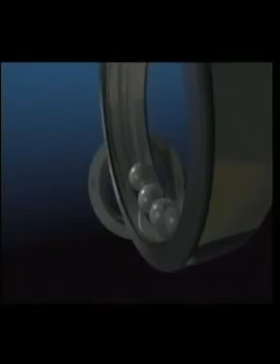The deep groove ball bearing is the most commonly used bearing in industry, being ideal for light loads and high speeds. It consists of an inner and outer ring and a set of balls separated by a cage. This bearing can accommodate radial and a combination of light radial and axial loads.

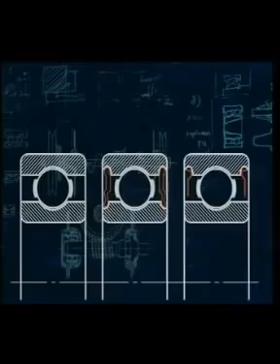The bearing can be supplied in an open condition or with 1 or 2 seals or metal shields. Completely sealed or shielded bearings are pre-greased during the manufacturing process and cannot be re-lubricated. They are commonly used in small electric motors, gearboxes, conveyor support rollers and similar equipment.

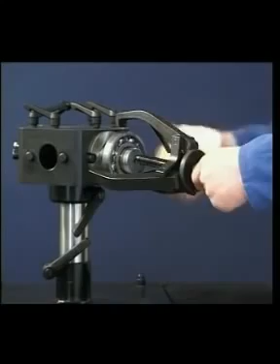For the dismounting of deep groove ball bearings, a number of methods are available depending on the setup of the bearing. The most frequently used method is for bearings with an interference fit on the shaft. For this application, a jaw-type puller can be used.

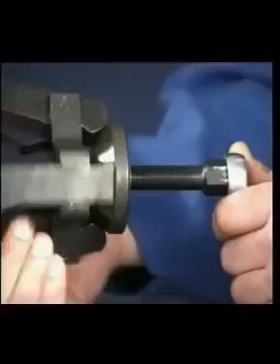The jaws are located behind the bearing, and by rotating the puller and the outer bearing ring, the bearing can be easily dismounted from the shaft, with minimum damage to the raceways.

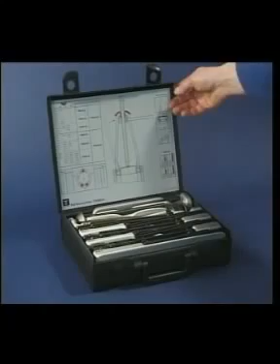In applications where it's not possible to get behind the bearing, SKF provides a special puller kit. Select the parts according to the chart on the lid of the box.

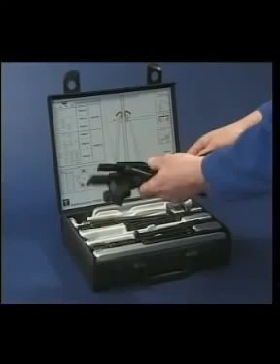The puller is assembled by placing the specially designed tips between the inner and outer raceways, ensuring pulling forces are on the outer bearing track. With this method, the bearing should never be reused.

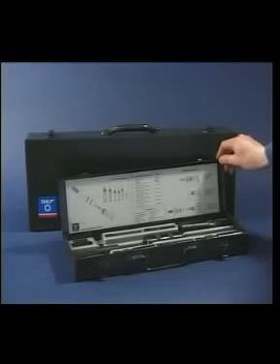In applications where the only access is through the bore of the bearing, SKF provides a split collet impact puller. The correct collet size is obtained from the chart which is fixed to the lid of the box.

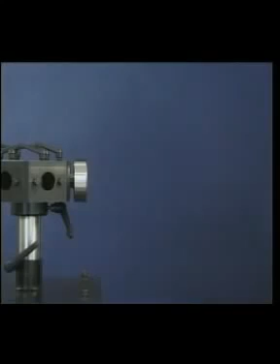The collet is placed through the bore of the bearing and expanded by tightening the collet nut. The slide hammer is then screwed to the collet and the bearing dismounted by impacting the slide hammer against the handle.

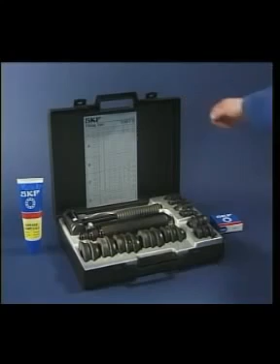The most common way of mounting small deep groove ball bearings is in a cold condition, using the special SKF fitting tool. The correct parts are identified from the chart on the inside of the toolbox. Do not remove the bearing from its box until everything is ready.

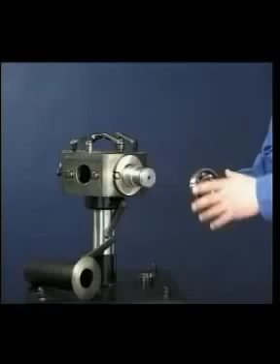Before mounting deep groove ball bearings, care must be taken to ensure that the shaft and housing are not damaged or worn. The use of some light oil on the shaft will assist the fitting.

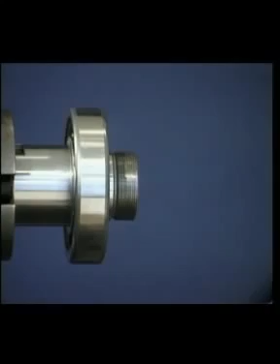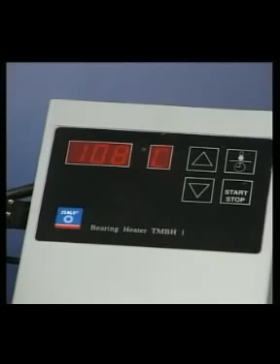For medium to large deep groove ball bearings, heat is often used to expand the bearing inner ring. SKF provides a wide range of bearing induction heaters for this purpose. In this instance, the TMBH 1 induction heater is used. Do not heat the bearing above 110 degrees centigrade and always use protective gloves.

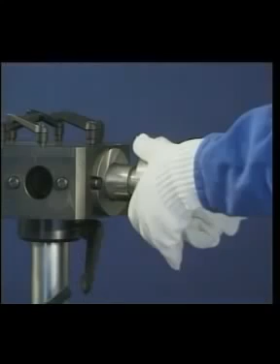The bearing should be held against the shaft shoulder until it cools sufficiently to grip the shaft.

When mechanically mounting deep groove ball bearings, damage to the bearing can occur if the mounting force is applied to the non-locating bearing ring, as this would allow the shock load to be transmitted through the rolling elements. The force must always be applied to the ring with the interference fit.

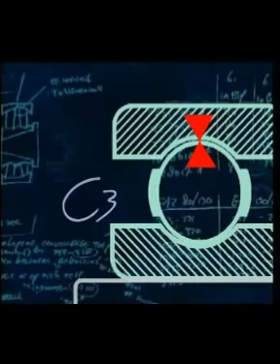Deep groove ball bearings are supplied with a range of predetermined radial internal clearances. Normal clearance is not marked. Bearings with a greater than normal clearance are marked with a C3 mark. Always make sure the replacement bearing is identical and has the same internal clearance as the original.